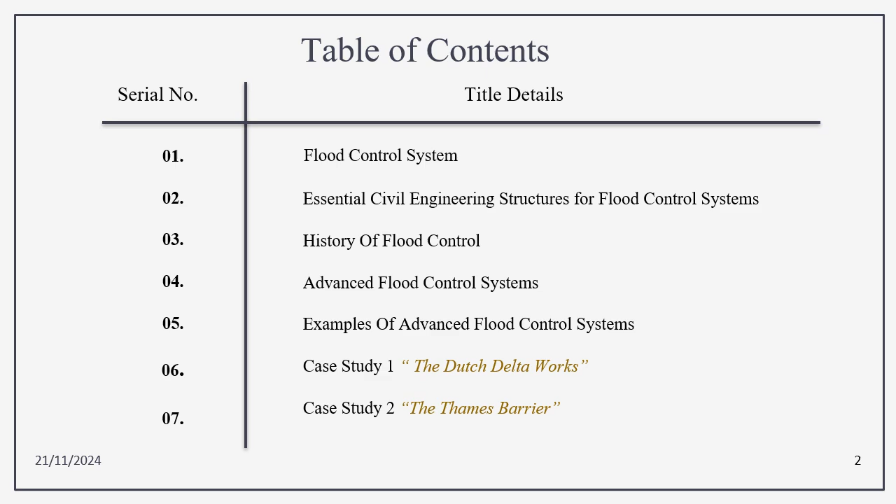Flood control systems are essential for managing and mitigating the impacts of flood, which can cause significant damage to life, property, and infrastructure. These systems integrate various engineering and non-engineering approaches to protect both urban and rural areas from excessive water inundation. For example, the MOSE project in Venice, Italy, is a remarkable flood defense system designed to safeguard the city from rising tides through innovative designs and strategies. Flood control systems play a crucial role in minimizing risk and ensuring safety.

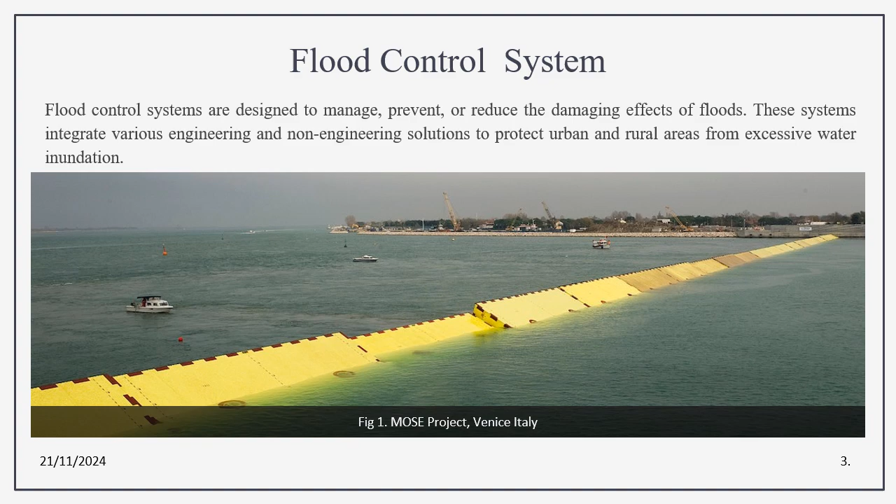Flood management relies on several key engineering structures. Dams store and control water flow, creating reservoirs that aid in flood control. Sluices regulate water levels by allowing controlled water passage, while locks enable ships to navigate different water levels safely. Dikes or embankments prevent water from flooding inland, and storm surge barriers, like those in coastal areas, protect against high tides and storm surges. These structures are meticulously designed to ensure stability and efficiency in diverse conditions.

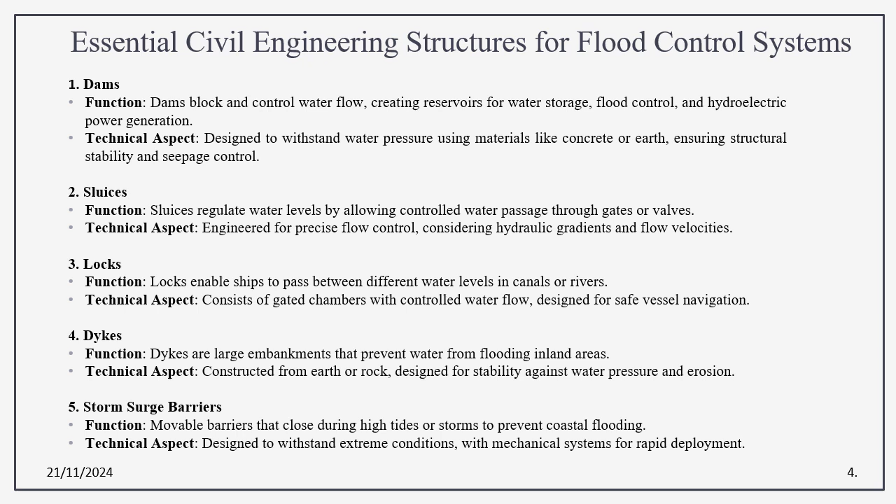History of flood control. The history of flood control is a long story of innovation and resilience, evolving over thousands of years. Let's begin with ancient times. In Mesopotamia, early civilizations built levees and dams using earth, stone, and reeds to manage the Tigris and Euphrates rivers. They also developed irrigation systems with channels and dikes to protect settlements and enhance agriculture.

Moving to Egypt, levees and dikes were vital for controlling the annual flooding of the Nile River. Indigenous systems of basins and channels dispersed floodwaters, preventing erosion while irrigating crops. The Romans added to this legacy with advanced aqueducts and drainage systems like the Cloaca Maxima, which prevented urban flooding and supported large cities.

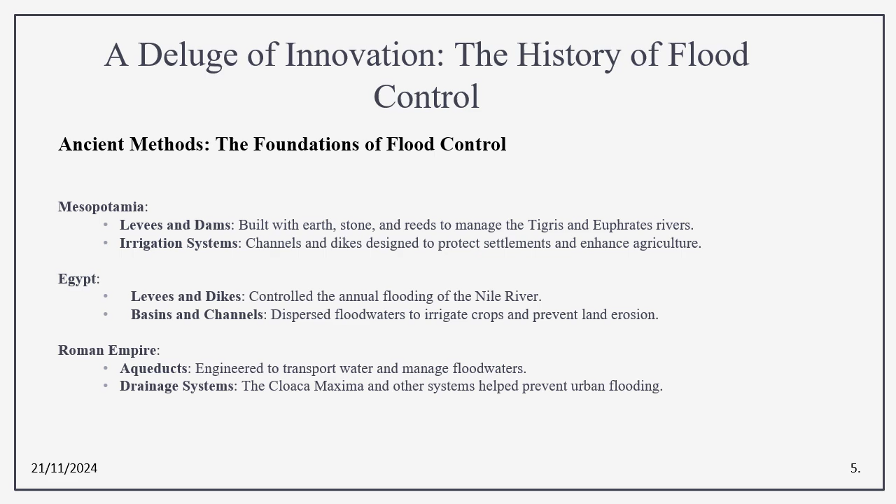Modern evolution. From the 9th century onwards, advancements in hydraulic engineering significantly improved flood control. Engineers began building larger and more resilient dams and levees to handle increasing water flows. By the 20th century, integrated systems combining dams, levees, flood walls, and retention basins became essential for managing urbanization and industrial growth. These developments set the stage for comprehensive flood defense systems that we witness today.

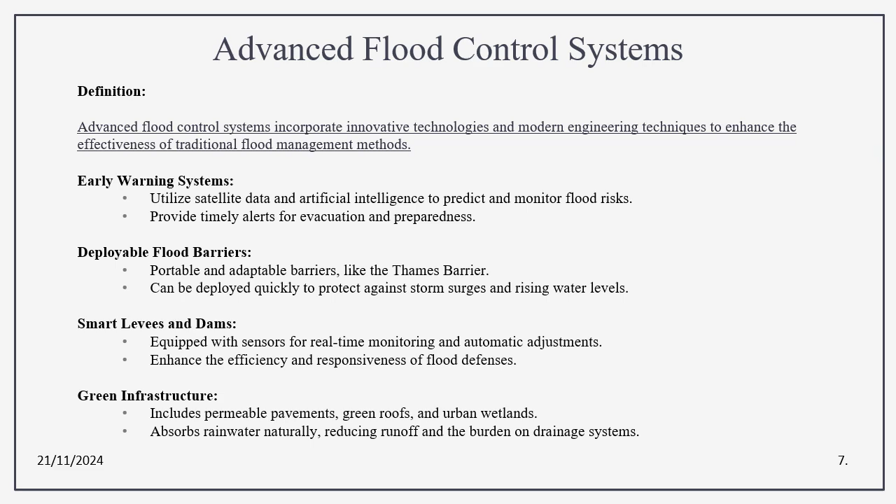Advanced flood control systems enhance traditional methods through modern technology. Early warning systems leverage satellite data and AI to predict and monitor flood risk. Deployable barriers, on the other hand, like the Thames Barrier, provide rapid protection against storm surges, while smart levees and dams use sensors for real-time monitoring and adjustments. Green infrastructure, such as permeable pavements and urban wetlands, integrates nature-based solutions to reduce runoff and support sustainability.

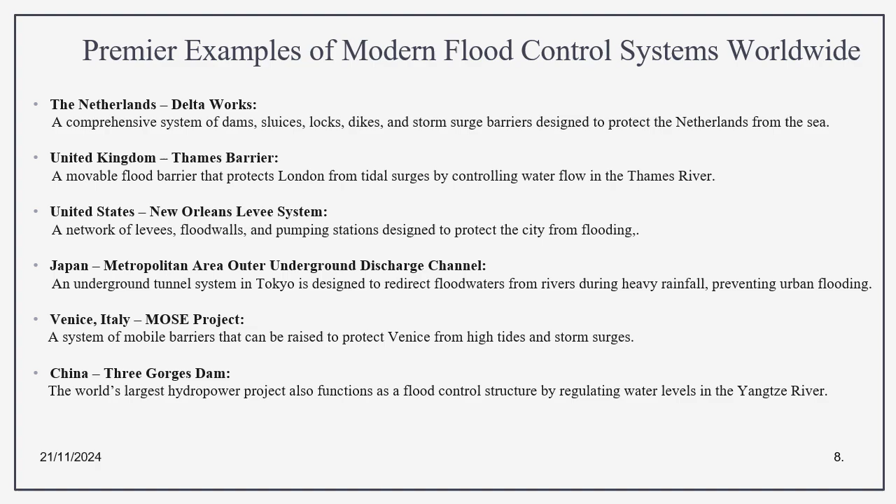Examples of modern flood control. Flood control engineering shines worldwide: the Dutch Delta Works protects the Netherlands with massive storm surge barriers. London's Thames Barrier shields against tidal surges. Tokyo's flood tunnels quietly redirect rainwater underground. New Orleans' levee system combines levees, flood walls, and pumps to defend against hurricanes. Venice's MOSE project lifts gates to block high tides. The Three Gorges Dam in China tames the Yangtze River. These systems showcase human ingenuity in tackling the force of nature.

Let's begin with our first case study, that is the Dutch Delta Works of the Netherlands. It is also regarded as the world's largest flood prevention system.

Introduction. The Dutch Delta Works is a comprehensive system of dams, sluices, locks, dikes, and storm surge barriers, designed to protect the Netherlands from flooding by controlling water flow in the southwestern river delta. Completed in 1997, the Delta Works is one of the most advanced flood defense systems in the world and serves as a model for flood prevention in coastal areas.

The creation of Delta Works was primarily driven by the devastating North Sea floods of 1953. This flood overwhelmed existing coastal defenses, causing widespread destruction across the Netherlands. Over 1,800 people lost their lives and more than 100,000 people were displaced. The flood also inundated vital agricultural areas and industrial infrastructure, highlighting the need for a more reliable flood defense. In response, the Dutch government initiated the Delta Works project to create a long-term solution to protect the nation from future floods, particularly given that much of the Netherlands lies below sea level.

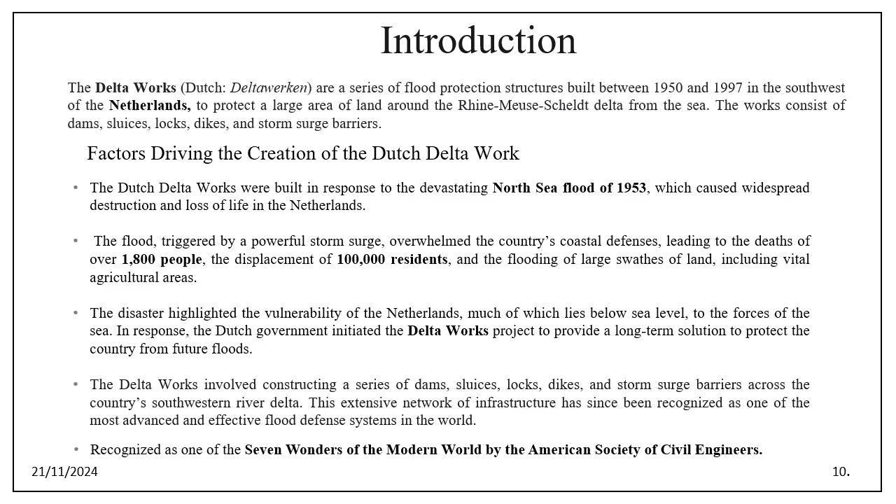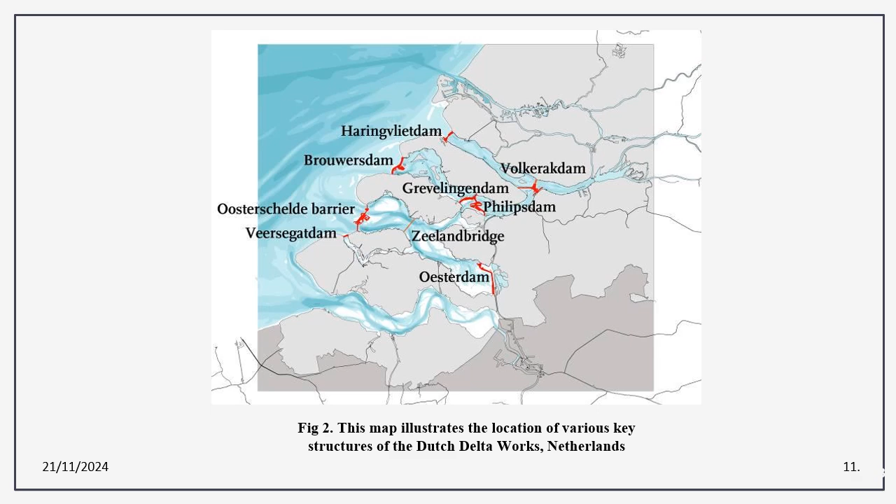Dutch Delta Works. This map illustrates the location of various key structures within the Delta Works. Each component plays a critical role in safeguarding the Netherlands from coastal flooding.

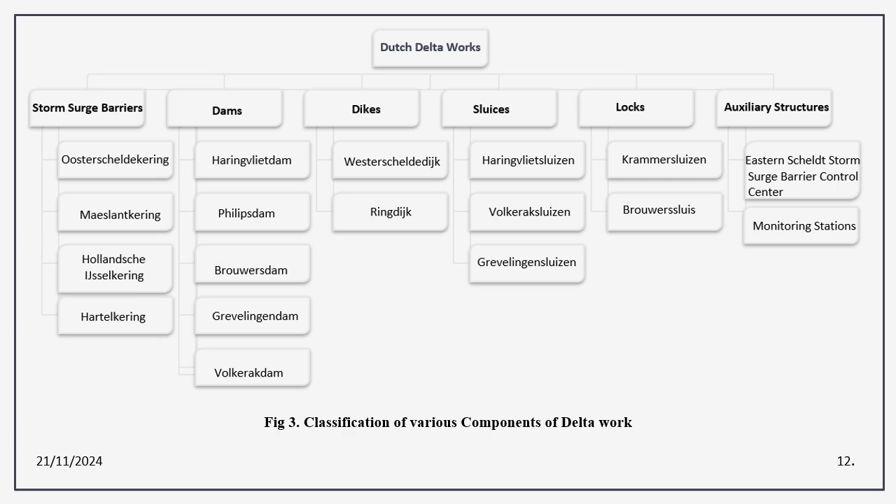Components of the Dutch Delta Works. The Dutch Delta Works consist of various key components, each playing a very crucial role in protecting the Netherlands from the rage of the sea.

First, we have Oosterschelde, the world's largest storm surge barrier. It closes only during extreme weather, balancing flood protection with natural tidal flows.

Next, we have Philipsdam. This dam separates freshwater and saltwater bodies, aiding both flood defense and ecological balance.

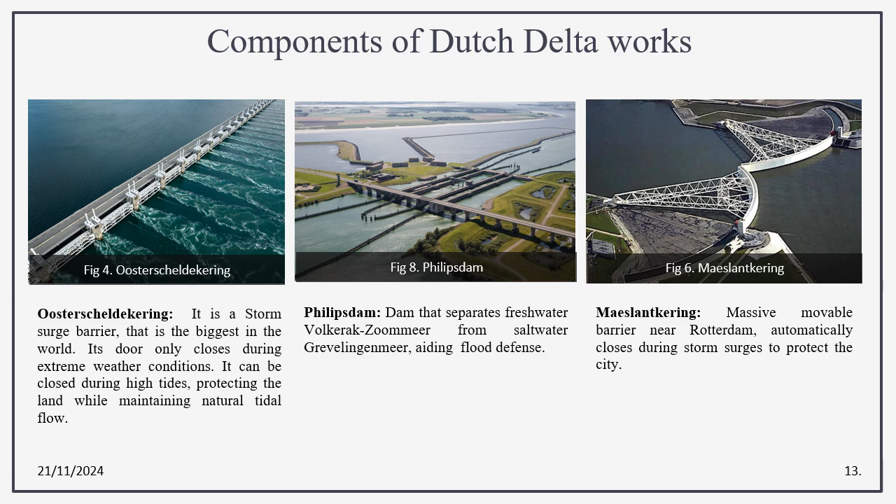Next is Maeslantkering, a massive movable barrier near Rotterdam that automatically closes during storm surges, ensuring city safety. Moving on, up next we have the Haringvliet sluice.

These regulate water flows and salinity between the North Sea and the Haringvliet estuary. Other structures like the Brouwersdam, Grevelingen Dam, Zandkreekdam, and etc., each play crucial roles in controlling water levels and preventing flooding.

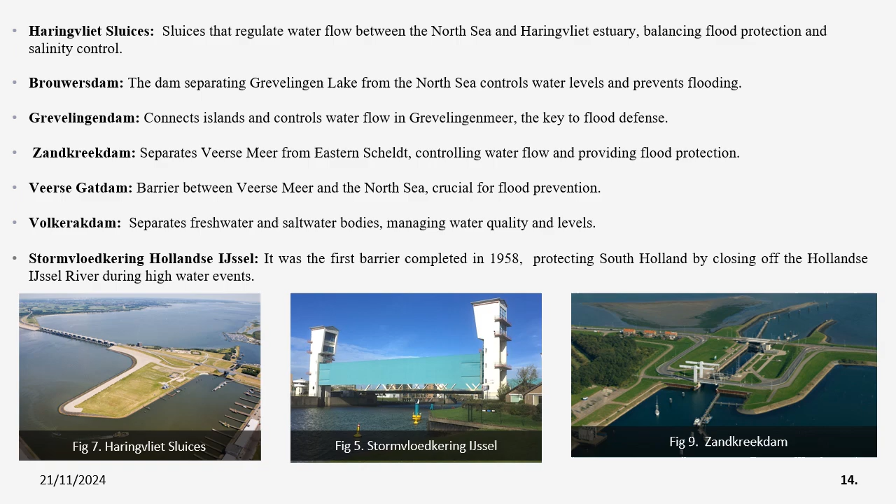Working of the Delta Works. The Delta Works is a remarkable system that protects the Netherlands by combining innovation and engineering.

It begins with damming the estuaries, turning the vulnerable inlets into lakes that now serve as natural preserves and recreational spaces. Next, flexible barriers like the Maeslantkering stand ready to protect key waterways.

These movable barriers close during storms to block surges, but stay open for everyday activities like shipping. Along the coast, reinforced defenses like grassy dikes and seawalls form a sturdy shield against ocean storms.

Inland, the Room for the River plan creates floodplains by moving dikes and farms, giving rivers space to overflow safely while nurturing wildlife habitats. Finally, cities like Rotterdam showcase integrated urban solutions, green roofs, elevated districts, and plazas that could double

as water storage during floods. Together, these measures ensure safety while adapting seamlessly to rising waters.

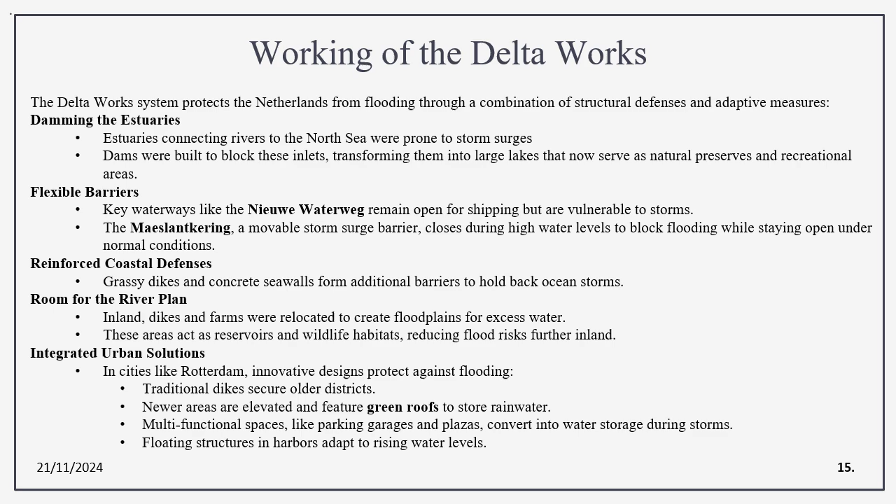Impact of the Dutch Delta Works. The Dutch Delta Works has significantly improved flood resilience, successfully preventing major incidents such as the North Sea storm surge of 1982, the storm of 1990, and the European floods of 2002.

It protects critical infrastructure, agriculture, and urban areas, ensuring economic stability. The system supports sustainable water management, transforming areas into natural preserves while contributing to the Netherlands' carbon neutrality goals through efficient water use and recycling.

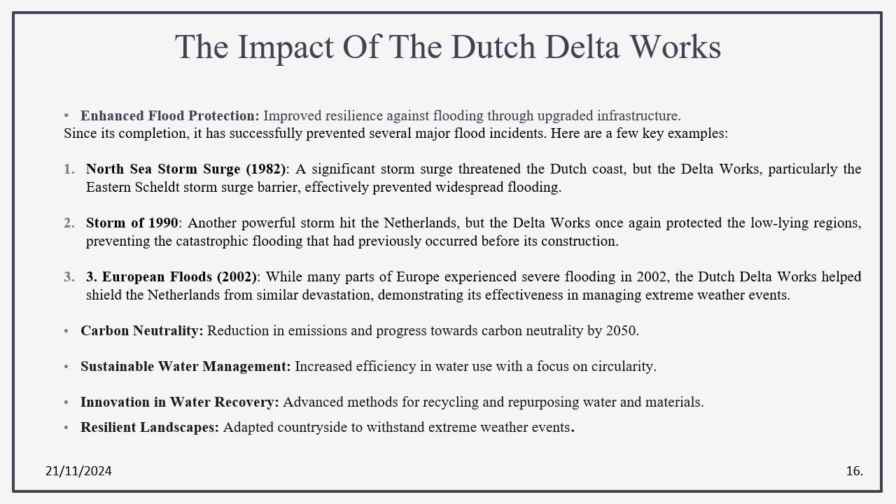Globally, it serves as a model flood defense system, inspiring similar projects in susceptible coastal areas.

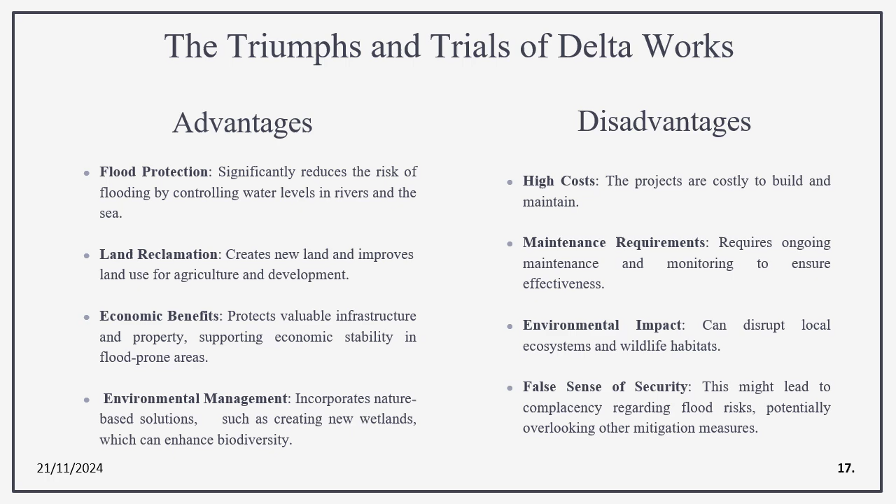Long-term goals for 2050 of the Dutch Delta Programme. The vision for 2050 includes achieving carbon neutrality, with three major investment areas. Number one, flood risk management - renovating dams, barriers, and coastline to withstand climate change.

Second, drinking water supply - develop facilities for seawater desalination. Third, countryside redesign - adapt landscapes to handle droughts and floods.

The program emphasizes sustainability and circular water use, promoting efficient resource management. Innovative projects like the Hydraloop project, which recovers 85% of the domestic water, and Vitens' water recovery, which extracts reusable material from underground water, showcase the commitment to innovation and collaboration for a resilient future.

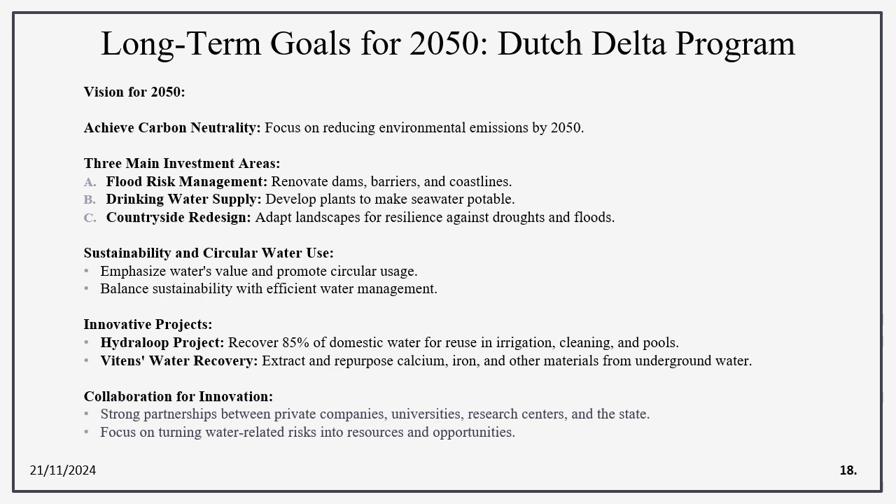Let's move on with the second case study, that is the Thames Barrier, located in London, England.

Introduction. Let's talk about one of the most iconic flood defense systems in the world, the Thames Barrier. Located downstream of central London, between Silvertown and New Charlton, this engineering marvel protects 125 square kilometers of the city. It safeguards 1.25 million residents, landmarks like the Houses of Parliament, the O2 Arena, and critical infrastructure such as

Canary Wharf. Built to shield London from tidal surges and rising sea levels, Thames Barrier plays a critical role in ensuring the safety and resilience of this bustling metropolis.

The timeline and design. The story of Thames Barrier began with the North Sea flood of 1953, a devastating event that emphasized the urgent need for a robust flood defense system. Construction started in 1974 and spanned a decade, with the barrier officially opened by Queen Elizabeth II in 1984.

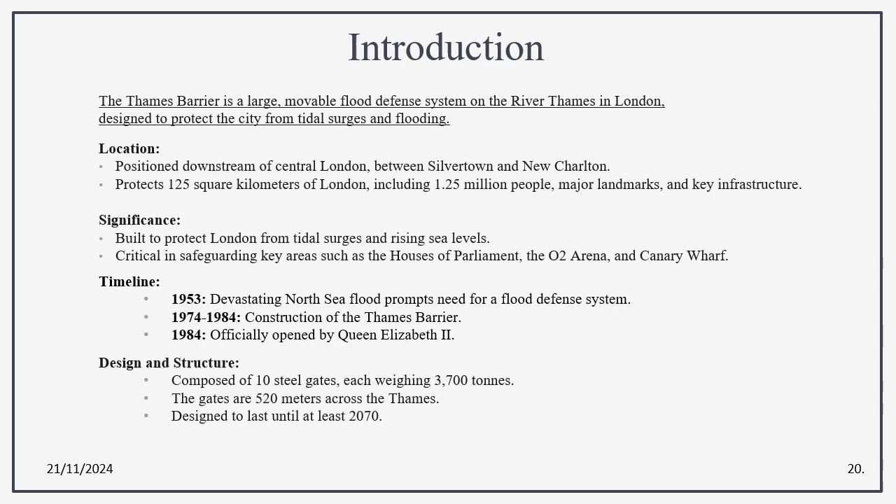The design is a feat of engineering brilliance. It consists of 10 steel gates, each weighing an impressive 3,700 tons, spanning 520 meters across the River Thames. Remarkably, it is designed to last until at least 2070, making it a long-term solution for London's flood risk.

This image showcases a closer location of Thames Barrier. You can see its strategic position on the Thames River and its impressive structure.

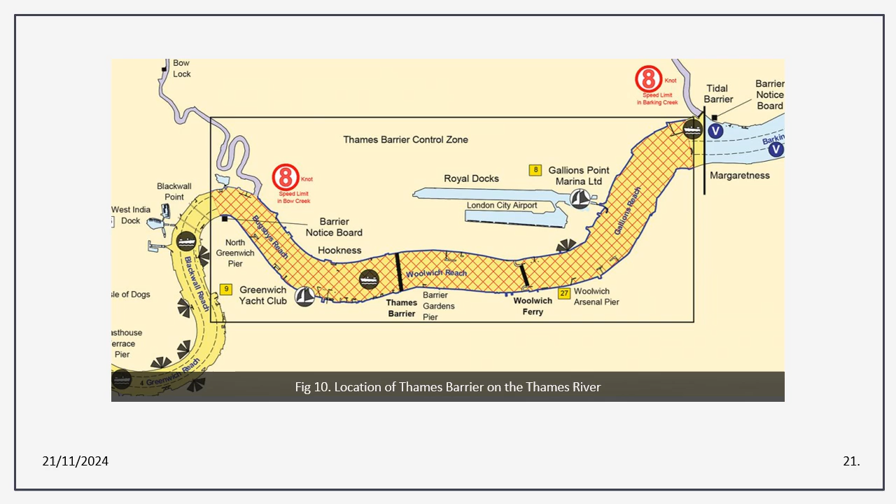Operation and technology. So, how does the Thames Barrier work? The gates are raised during high tides or storm surges based on weather forecast and water level monitoring. These gates rotate upward, fully deploying within just 30 minutes, creating a sturdy wall against rising waters.

Typically, the barrier is activated 6 to 7 times a year depending on weather conditions. In the control room, operators use real time data and predictive models to make an informed decision. This entire system is remote controlled with automated mechanisms ensuring precision.

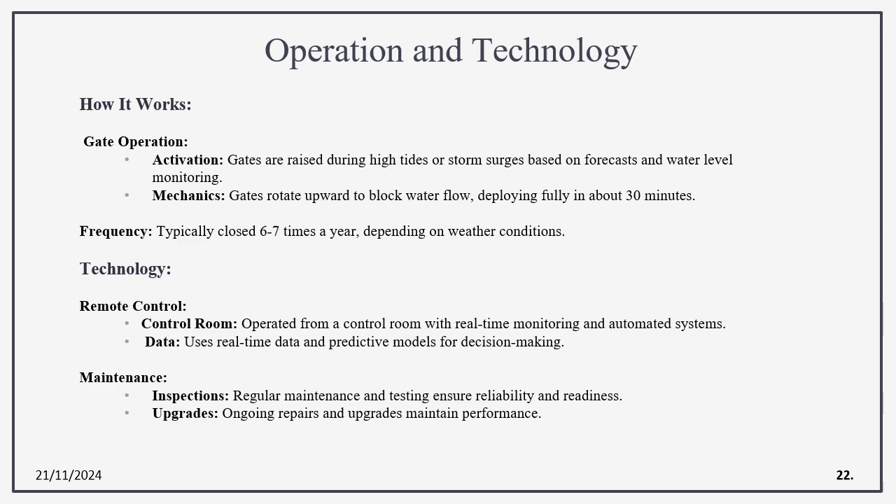Maintenance is a top priority. Regular inspections and upgrades are carried out to ensure the barrier remains reliable and effective.

Future and challenges. Like all infrastructure, the Thames Barrier faces future challenges. Climate change is causing sea levels to rise and increasing the frequency of tidal surges. While the barrier is expected to function until 2070, plans are already in place for upgrades or even a replacement.

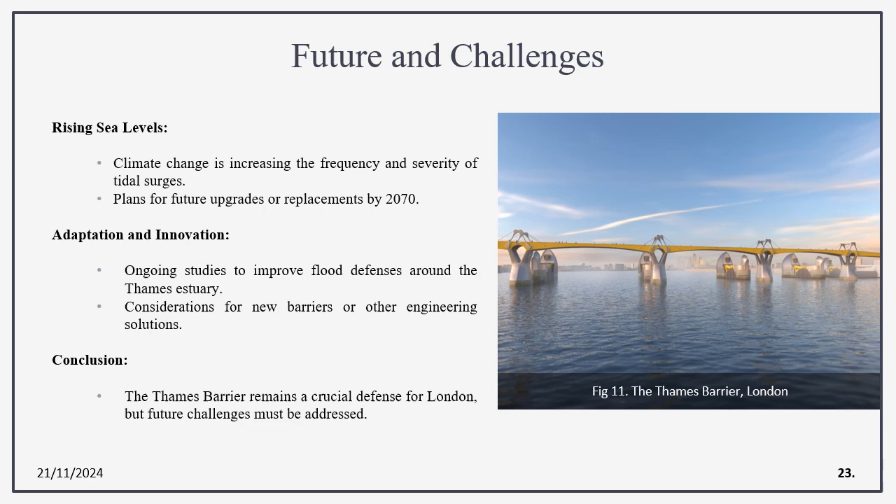Researchers are exploring innovative solutions to enhance the defense around the Thames estuary, considering options like new barriers or advanced engineering technologies. While the Thames Barrier remains a crucial defense for London, addressing these evolving challenges will be key to its continued success.